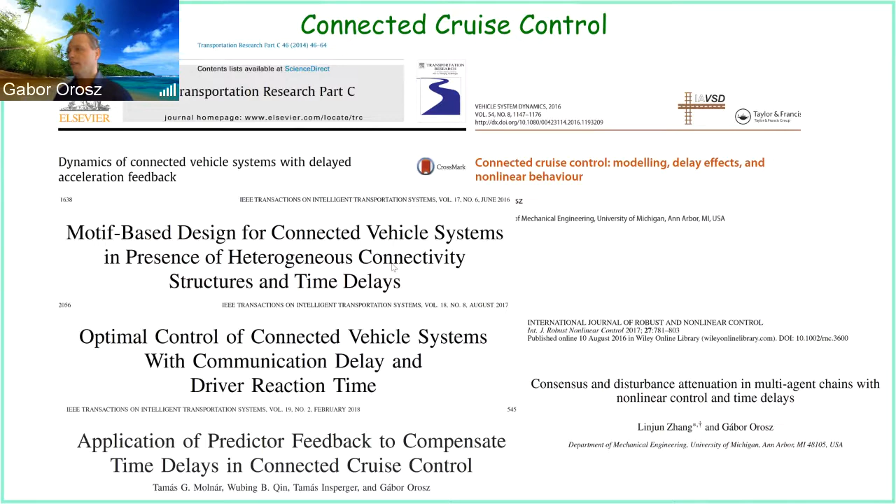But let me start with some very simple things. So, at the University of Michigan, we are very close to Detroit and the auto industry. So we do a lot of vehicle dynamics and control. Okay, and this is some basic knowledge which we also tell the students. So I want to review it so we are on the same wavelength. Okay, so this is a very prototypical model of longitudinal vehicle dynamics.

And what you can see here is that we represent the position of the vehicle and the velocity or speed of the vehicle along the road. But there are additional effects which can influence us. In particular, we have gravity. We also have rolling resistance. We also have air resistance.

And this last term here, which I'm going to highlight, if my mouse works. Yep. So this one is related to the torque, which we are putting on the wheel. Okay. And I immediately put something here. So there are two important quantities I'm highlighting here. So first of all, we can't put as large wheel torque as we want. There is some kind of saturation function related to that. And on the right, I'm showing this saturation function.

Essentially, what it results in is that we can't output in terms of desired acceleration as large as we want. So we will be limited between, let's say, somewhere maybe -8 to +3 meters per second squared in case of a vehicle. As a matter of fact, it's a little more complicated, as this other figure shows here, that the power limit of the vehicle also matters. So how many horsepower you have, that is going to influence in particular the high velocity regions.

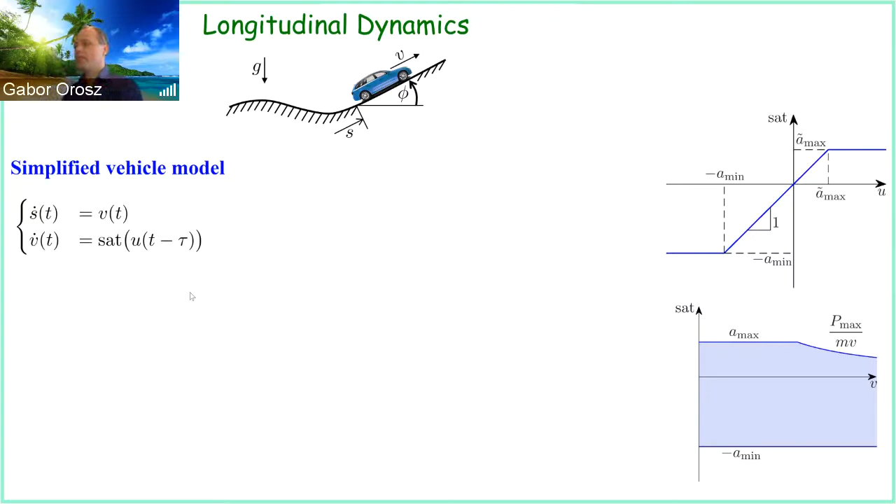Okay, so of course, this is a lonely vehicle on a lonely road. We're more interested in what happens when the vehicle has to respond to other vehicles ahead. So when we talk about adaptive cruise control, then we at least have to have two vehicles. So this automated vehicle is the one which I'm trying to control, and there is a human-driven vehicle which I'm sensing via a radar in this case. So you can also use cameras or LiDAR or whatever sensors you have, but you have to have a line of sight to be able to see this vehicle.

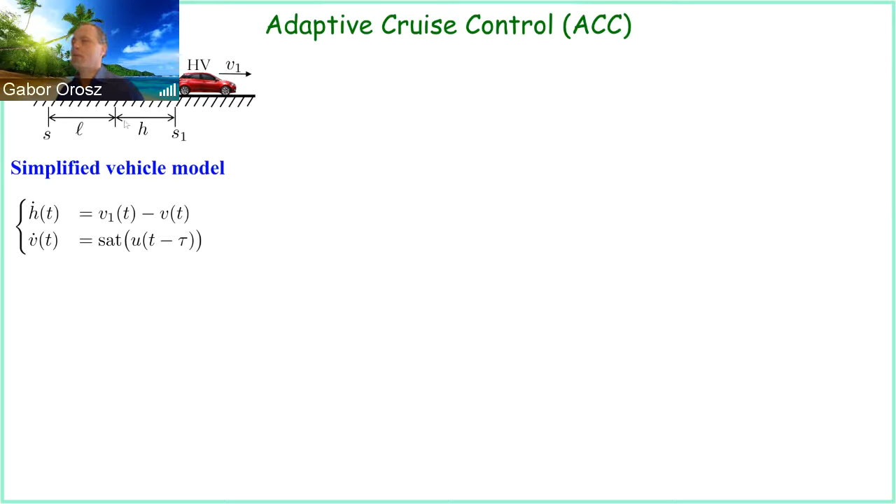And again, this is the simplified model. I changed the first equation. Rather than using the position of the vehicle, now I'm using the distance, because that's kind of part of the goal this vehicle wants to achieve. It wants to keep a distance from the other vehicle. Okay? And actually now there are standards about what is required for ACC. So there is typically a desired behavior which is saying that the vehicle should have a set speed. So we shouldn't go faster than that.

And also, if the distance gets smaller, so traffic is getting denser, then we try to keep a constant time headway here. So this kappa gradient of this range policy, or some people call it the optimal velocity function, is actually going to be equal to 1 over kappa. So the time headway is 1 over kappa, and kappa is the gradient. Okay, and this is one of the important parameters.

If you buy an ACC vehicle, then you actually often have these adjustments. You have like 1 bar, 2 bar, 3 bar, 4 bar. 1 bar actually corresponds to a really high kappa, which means a very short time headway, and 4 bar typically is more relaxed. So essentially that means that you have a smaller kappa and a larger time headway. So this is pretty much baked into every vehicle on the road which is ACC. And then for low speed, you typically want to stop, right? So you have to shift this a little bit, so you stop in a reasonable stopping distance.

So arguably the simplest algorithm to be able to maintain it consists of two terms. The first term is directly trying to adjust the velocity to this range policy. So that's kind of maintaining the distance with respect to the velocity, or the velocity with respect to the distance. So this is going to be the control input which we put out there. And the second term is simply trying to match the speed to the vehicle ahead.

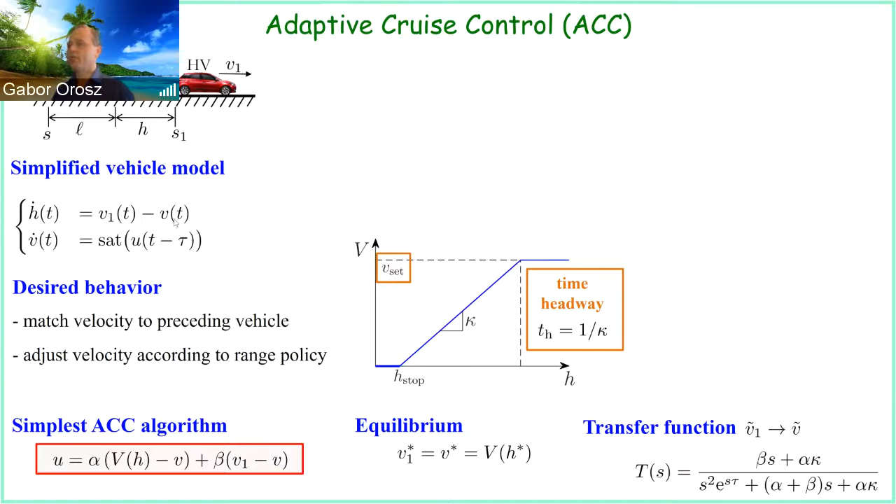So we linearize around this equilibrium and look at the perturbations around the equilibrium in the speed of the red vehicle and the speed of the blue vehicle. And this transfer function is what we use in order to evaluate the dynamic behavior of the system. Okay, so I would like to spend a couple of slides on looking at it, just to build up the tools which we typically use to design ACC, and then I'm going to show you how it actually works in practice.

So there are two kinds of stability which we are very much interested in when we design an ACC. One we refer to as plant stability. Honestly, there are different ways to call it, but this is just the standard notion of stability of dynamic systems that everyone refers to. If the system is stable, then when the driver ahead is running with a constant speed, we shall be able to approach this speed and follow it eventually with the right distance and the same velocity.

And if the system happens to be plant unstable, then this would not happen, and you can see immediately this would be a very detrimental behavior. Essentially, a plant unstable vehicle will very likely hit the one ahead. So if you are in the industry, you definitely want to make sure that your system is plant stable, because otherwise it would not be safe.

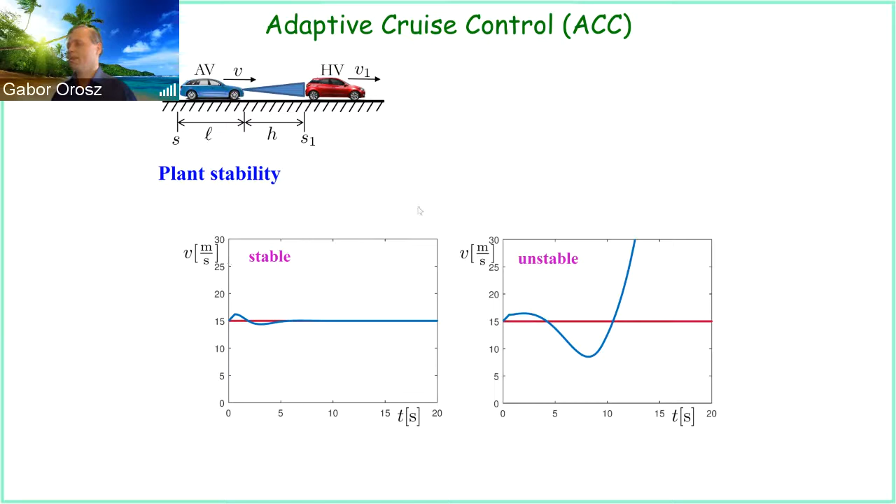So the way we evaluate it for our transfer function is we look at the denominator of the transfer function. We refer to it as the characteristic equation, and then we calculate the characteristic roots. However, if you have time delay in the system, which I'm showing here in this e to the s tau term, then it turns out you have infinitely many characteristic roots. This is one of the properties of time delay systems, and we really have to take care of all of them and keep them on the left-hand side in order to make sure that the system is stable.

So the task is a little bit harder than for ordinary differential equations, where the spectrum is just a finite number of eigenvalues. Still, we can ensure it and draw what we refer to as the stability chart. In this particular case, I'm plotting the stability chart for a particular value of the delay and a particular value of the time headway kappa, which I didn't note here, but it's 0.6 1/second.

And I'm plotting this chart on the plane of the control gains, because these parameters are the ones which we can design when we implement the controller on the vehicle, so we can tune these and choose one nice combination which has to be, of course, in this plant stable area. If you look at the eigenvalues, then indeed, inside this domain, all the eigenvalues or characteristic roots are on the left-hand side. If you are outside of the area, then you have some characteristic roots which are responsible for this instability.

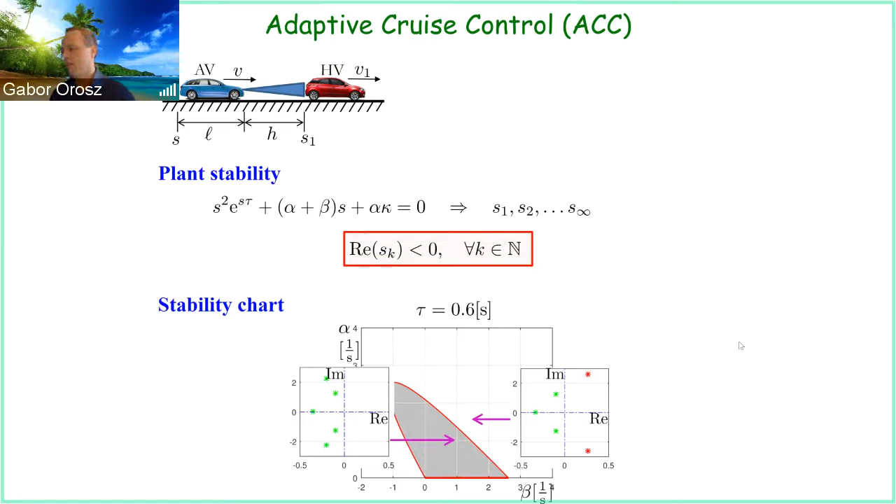Now, there is another notion of stability which we are also very much interested in. In the control literature, people call it input-output stability. A more specific version of it we refer to as string stability. String stability comes from the fact that after all, there could be many vehicles after each other and they make a string. But I'm going to explain it just in terms of two vehicles using the velocity.

Basically, the idea is that if our leader does some kind of velocity fluctuations around the steady state, then our follower automated vehicle is supposed to decay them and make these amplitudes smaller than the leading vehicle's. If the system is string unstable, it's probably not a big issue in terms of safety if these oscillations are not large enough. But it can be detrimental in terms of the traffic flow, because if all vehicles are doing this, then their motion will eventually lead to congestion.

Okay, and there are a few new papers on the market which say that essentially many of the ACCs which are sold today are string unstable, and the reason for that is because the companies may not be interested that much in the overall traffic behavior, but they're more interested in the passenger comfort, so they tune these controllers in order to achieve that.

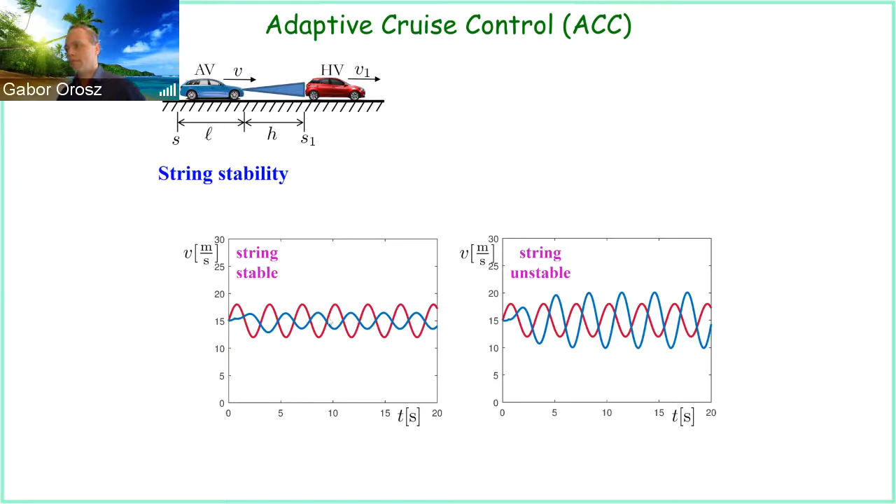Okay. Again, there is a nice condition which allows us to evaluate string stability, and we are going to use again the transfer function between the two vehicles. And if the transfer function is smaller than 1 for all frequencies, then we refer to the system as string stable, at least at the linear level, and in particular you have to specify what norm you're using and so on. Okay, I'm not going to get into these details, but the nice thing about this condition is that it's computable, and again we can actually turn it into a stability chart.

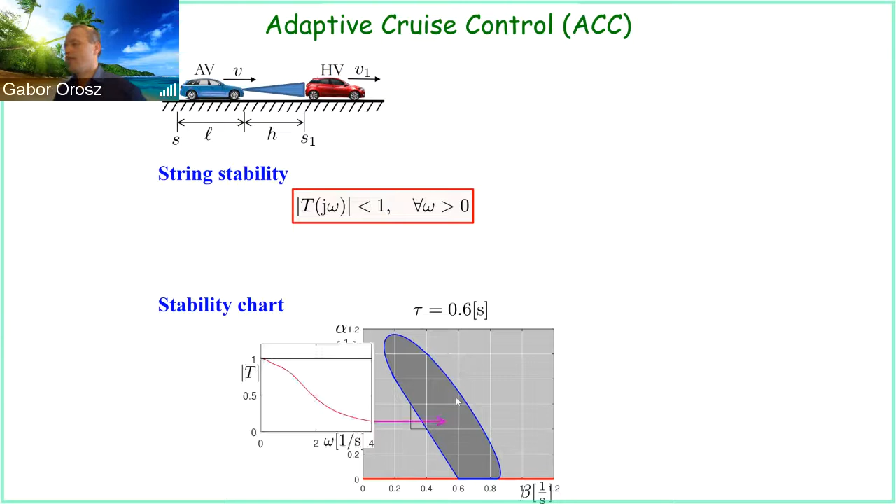So what I did here, I zoomed into the previous stability chart. That's why everything is light gray, so this is all plant stable, and then I drew this diagram here, which is the string stable area. Okay, and an important thing again is that if you didn't have delay in the system, then this entire big upper part here would be string stable, but because of the delay, we're going to have a much smaller domain. Okay, now if you are in this string stable domain, then your transfer function is always smaller than 1 for all frequencies.

If you are outside of the domain, then the transfer function is going to be larger than 1 for some frequency domains. It's not necessarily larger than 1 for all frequencies, but some frequencies. And these are the frequencies your vehicle is going to be sensitive to. So if you get excitations from the leader in these frequencies, then essentially you will have this issue of string instability. Okay? And a very important thing that happens here is as you increase the delay, there will be a critical time delay, and beyond that delay, basically there will be no string stable area.

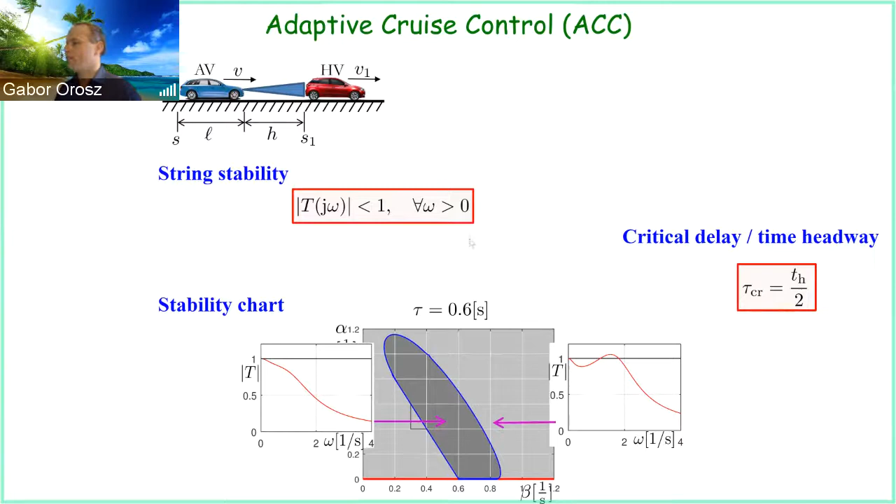Okay, and interestingly, this is nothing else but half of your time headway. This can be shown analytically, and so what it means is that if you try to travel with a 1 second time headway, you cannot have larger than half a second delay in your system. Okay, or vice versa, if you have a delay given, for example in this case 0.6, your time headway has to be at least 1.2 seconds in order to have the possibility to have some string stability. Okay, and it's a very strong condition on the system, and I will show you that actually this is true in experiments as well.

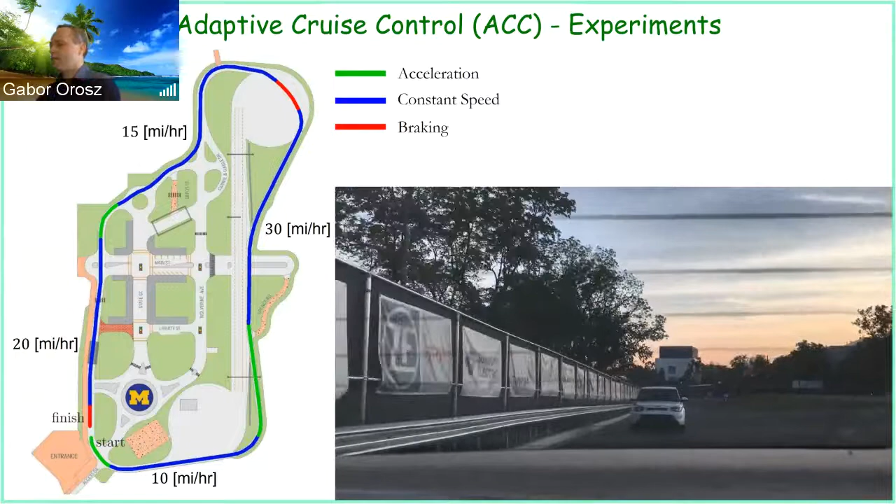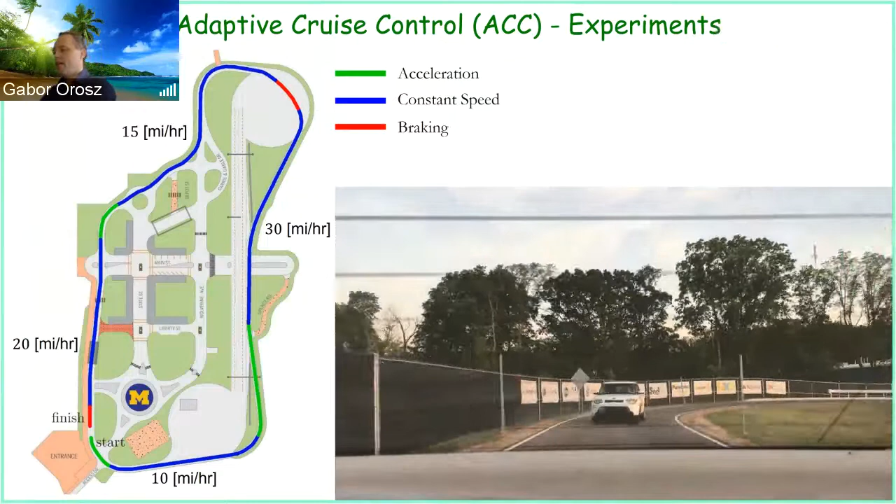So now you see basically the camera from the leading vehicle looking back to the automated vehicle. So the automated vehicle is following us. And the test we were running consisted of acceleration, braking, and also some constant speed sections. So this is one of the constant speed sections. You will see this is where we start to accelerate. And then the other vehicle is going to lag behind a little bit, right? And then eventually catches up with us.

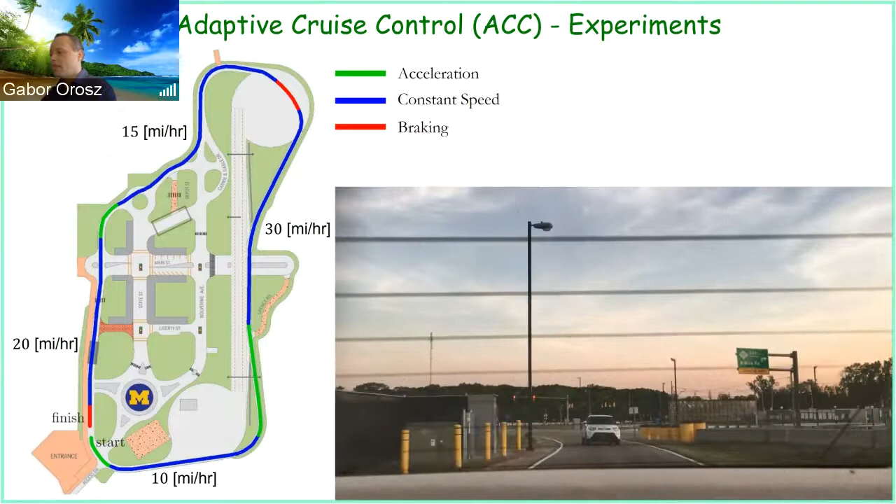Again, we run a constant speed section, and there will be a relatively harsh braking at the end of this part of the section. We are taking the curve, so we are somewhere up here on the northern part of the test track, and soon you can see that it worked really nicely. The vehicle behind us stopped. The driver was just there for safety, but he was so relaxed that he even put his hand out on the vehicle.

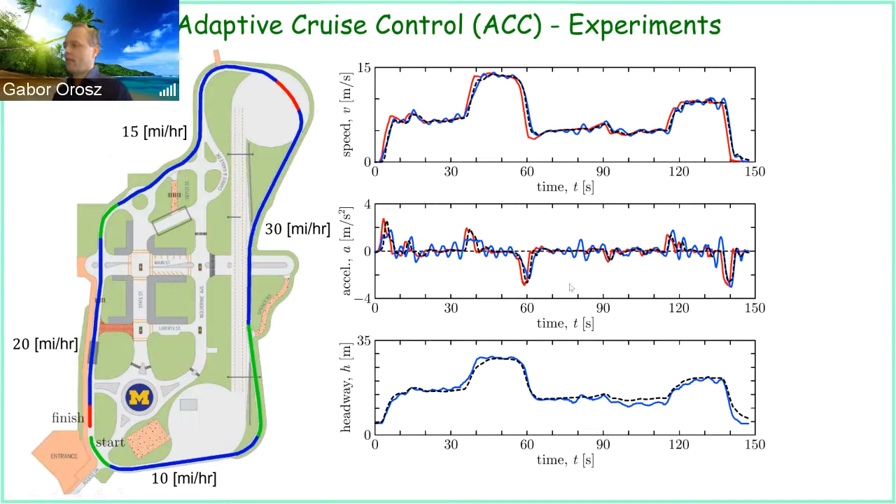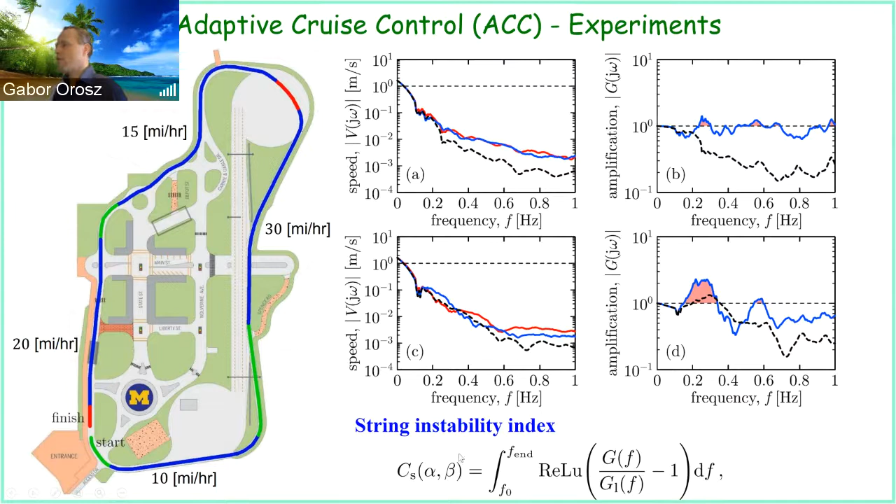But now you can see in case of the bad run, things get much worse. As a matter of fact, in this case, both the theoretical and the experimental data show a pretty large peak here. So it actually shows that we have a string instability in the system. And to quantify it, what we basically do is integrate these red parts, and this index, which we call the string instability index, is very useful to evaluate the experimental data. It accounts for this larger than 1 area. So if this is large, that means the system is quite string unstable, so you don't want to choose those particular parameters for your ACC system.

So here is how it looks, and now I put these string instability indices on top of the string stability chart. The string stability chart is drawn for 3 different delay values, just to see how robust we are to that. And again, the size of the points is related to how string unstable you are. So what it shows is that this middle area here is actually doing pretty well, and that's exactly where we have string stability according to theoretical calculation.

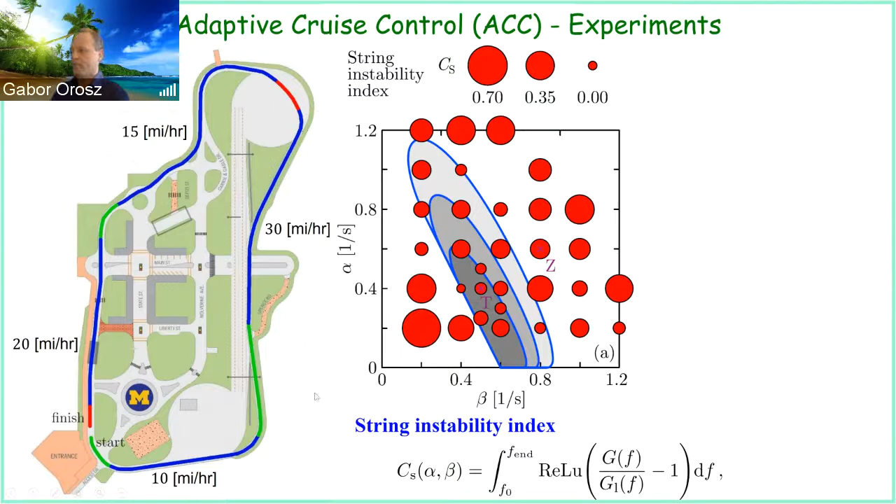But if you are outside, and this Z was actually the bad data which I showed you, then you can have much worse behavior. So this allows us to, number one, justify the theoretical calculations, and number two, really choose and fine-tune these parameters in order to have a nice ride. So that's kind of the typical way someone can design a string stable ACC controller. Now let me show you a little bit more on this.

So, in the traffic flow community, there is a big question: how are these ACC controllers going to influence traffic when we mix them into the flow? What I'm showing here are actually 4 different simulations for 4 different penetration levels of automated vehicles, and I'm using exactly that nice design which I showed. The human drivers are described by the optimal velocity model in this case, but you could use the IDM, the intelligent driver model, if you want. That wouldn't change too much.

And what happens is that if we only have human drivers, then indeed the system is string unstable. So an initial braking from the black vehicle at the front is actually going to propagate and keep increasing.

Okay. If you mix AVs into the system, you can see it starts to get much better. For example, down here, I think it's maybe 15% penetration of AVs. It's about 33% and 50%. And indeed, as the AV penetration gets higher, because these vehicles are designed to be string stable, we start to have better behavior. And maybe around 50%, actually, you reach string stability. So that's a pretty high penetration of AVs required to actually stabilize the flow.

And just to mention here, the human parameters were also obtained from real data, so they are not just made up. These human drivers really drive this way, so these are realistic parameters. Okay, so it says that if we have AVs and they drive nicely, and the second condition is very important, then actually we can improve the traffic flow significantly. But it also says that we need a large penetration of these vehicles in order to make sure that the traffic is actually string stable.

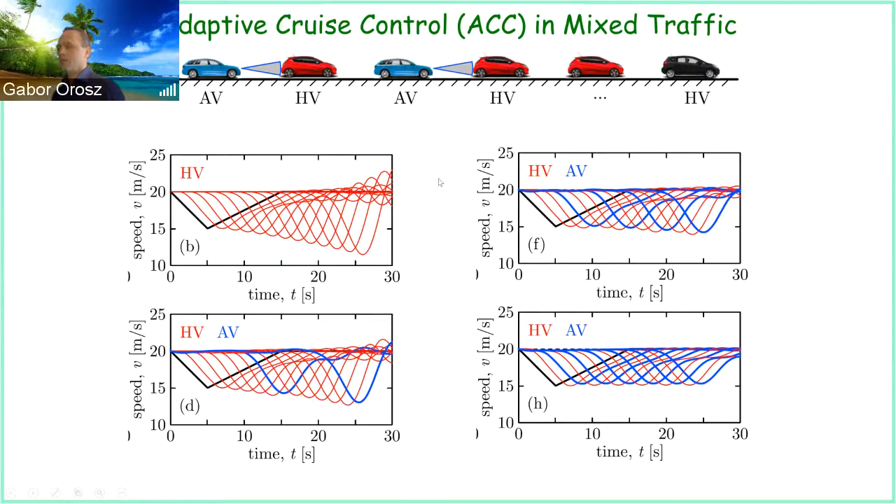Okay? So now I would like to switch gears and talk a little bit about connectivity. So far I haven't really mentioned any of this. These vehicles could achieve this motion just by optical sensors, so radar, lidars, and cameras, and that's how the current AV industry is rolling these days. Okay? So let me show you what happens if we add connectivity to the system. Now, in order to explain the concept, I'm going to look at probably the simplest possible scenario.

Okay, so I'm only focused on these 3 vehicles. The first 2 vehicles are human-driven vehicles. They are not automated by any means, but the first vehicle here actually has connectivity. So what it means is that this connected automated vehicle is able to sense the vehicle ahead by the range sensors and able to get motion information from beyond the line of sight using connectivity.

Okay, and when I turn it into the control design, this first part of the controller is exactly what we had before. And the second part is actually coming from this connectivity, and as you can see, it's very simple. It's just a velocity difference. So this CAV is trying to match its velocity not just to the vehicle ahead, but also to the vehicle which is 2 vehicles ahead. Okay, this is that simple. At the same time, I'm using the same range policy of following. I didn't change anything on that.

Okay, now the system becomes a little bit more complicated, right? Because we have to account for more vehicles and think about string stability a little bit more carefully. Now, what we did is we basically again go to the level of transfer functions, and we figure out how the HV responds to the CHV and also how the CAV responds to the HV and to the CHV, and these are represented by these transfer functions, and we call them link transfer functions. After you linearize your equation of motion, that of course includes modeling, in this case, the human-driven vehicle with some car-following model, then you can actually establish these transfer functions.

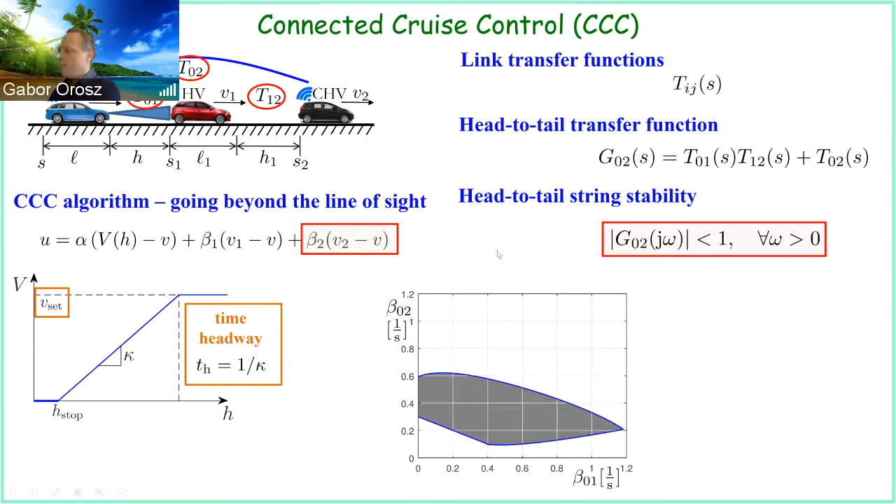Okay. If you add the connectivity, you can actually push it below 1, okay? And in this case, this becomes a really nice and string stable system, okay? And it's quite a dramatic improvement. And the only thing we did, we added connectivity between the lead vehicle and this last vehicle, okay?

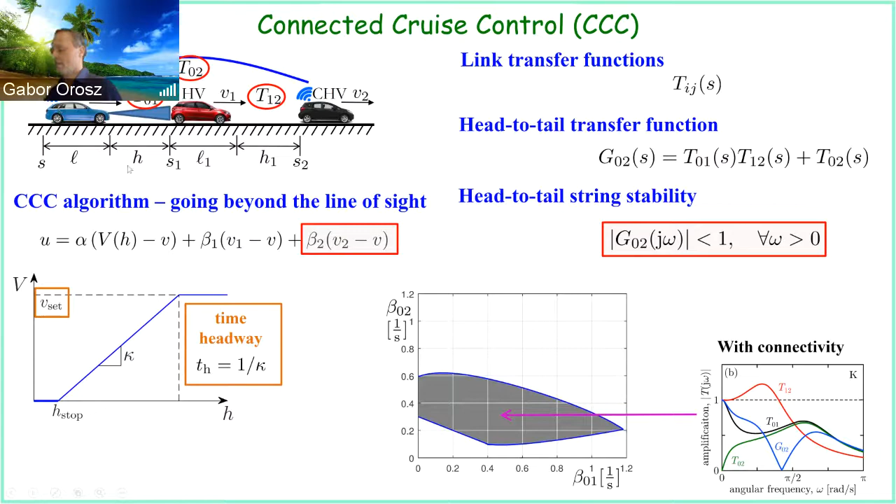Of course, we want to make sure that this is scalable for larger systems, okay? And we have the right amount of modularity, I believe, because we are not requiring these guys to cooperate in this case. We can't, right? The human here is just human. We simply use extra information at the CAV. Okay? So now let me show you some experimental results.

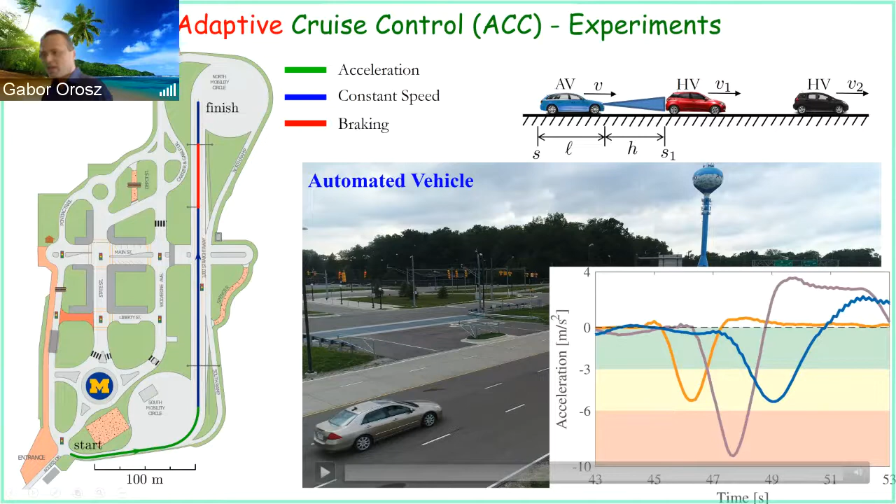So what it means is that it's doing much better than the vehicle in front of it, but in terms of head to tail, it's still doing roughly as bad or as good as the front vehicle. Okay, so this is still a harsh braking. You would really know if someone does a braking like this.

However, if you add the connectivity, you can see you get into this green zone here. So your acceleration actually goes around minus 2.5 meters per second squared. That means if you have a cup of coffee in your hand, not a droplet would spill out. Okay, this is a very nice and very smooth ride. And the only thing we did was count in this additional effect of connectivity.

Okay, so obviously this has severe safety implications, right? Because especially now in Michigan, you know, it's very slippery out there. You would not actually be able to do these very harsh accelerations, okay? Because your vehicle would slip. But also there is a high level of comfort, which is helping us here, okay? And our original motivation was also making sure that this is helping the traffic flow of the vehicles. And I will show you that actually it is the case. This is indeed scalable for a larger number of vehicles.

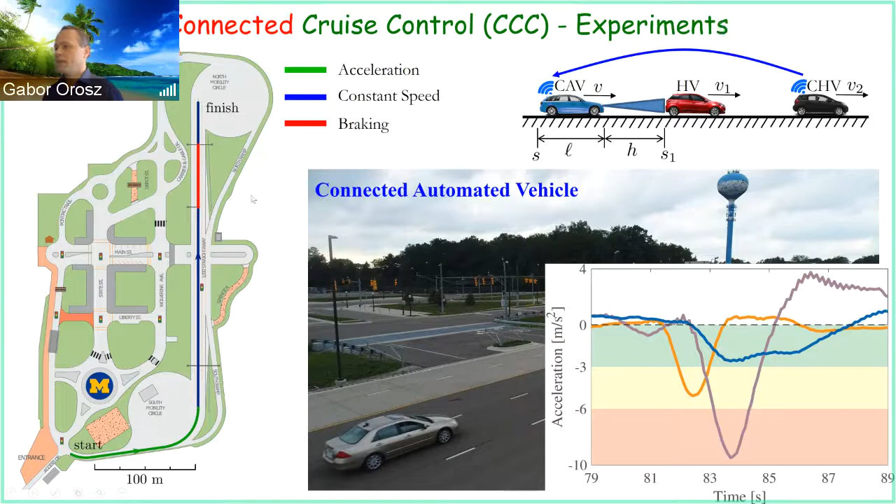Okay. So let me show you here a simulation. So the top shows the scenario for a mixed traffic system where we don't have connectivity. Okay. We only have AVs, and as you can see for this particular motion, if every second vehicle is an AV, then we are indeed achieving this mild string stability. If every third vehicle is an AV, right, so 33% penetration, then we are kind of at the limit, okay? So for this particular signal, it kind of shows that it levels out. If you do a slightly different signal, you may get a little increase, okay?

The same thing is shown with connectivity at the bottom, okay? Where you can see how dramatically it improves the behavior, right? So in this case, the waves decay much, much faster, with the same penetration as we had AVs above. And if we have even lower penetrations, we can get very nice behavior, okay?

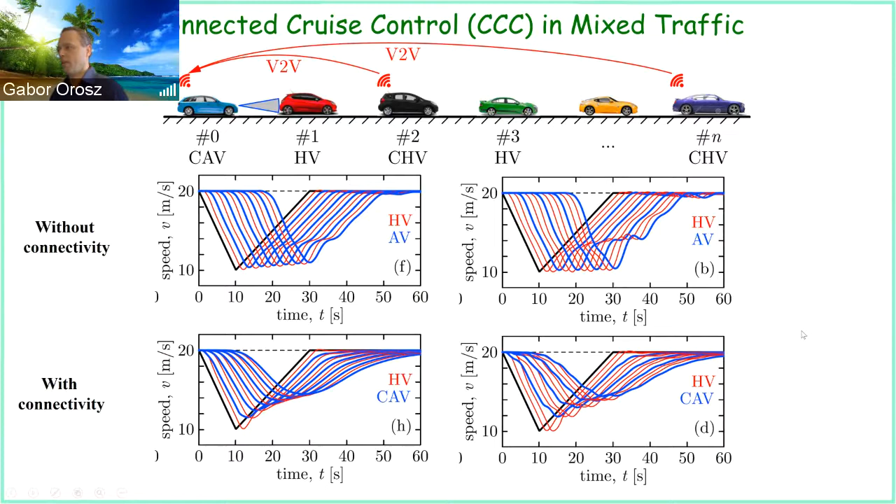So for low penetrations, the AV was doing some marginal case. When we do CAVs, we still have a very nice and beautiful behavior, almost matching the higher penetration. So this tells us that if we have connectivity in the system, then much lower levels of automation can actually give us nice traffic flow, okay? It does require, of course, that these vehicles are designed properly, and if you do so, then you can actually achieve this behavior.

Okay, so what we did was we put a chain of human-driven vehicles along this stretch of road, and then we asked the first driver to drive and basically make some brakes along the way. And these brakings are trying to mimic what happens in traffic. People often have these changes of speed, and we wanted to see how it propagates along the chain of vehicles.

And what I'm showing here is when we ran an ACC, a nicely designed and tuned ACC, and what you see is that the humans are actually increasing the perturbations as they propagate along the chain, while the AV cuts back a little. So if you compare the blue one and the red one, the blue is doing a little better than the red one. So experimentally, we were able to show that indeed the AV has a positive effect, okay?

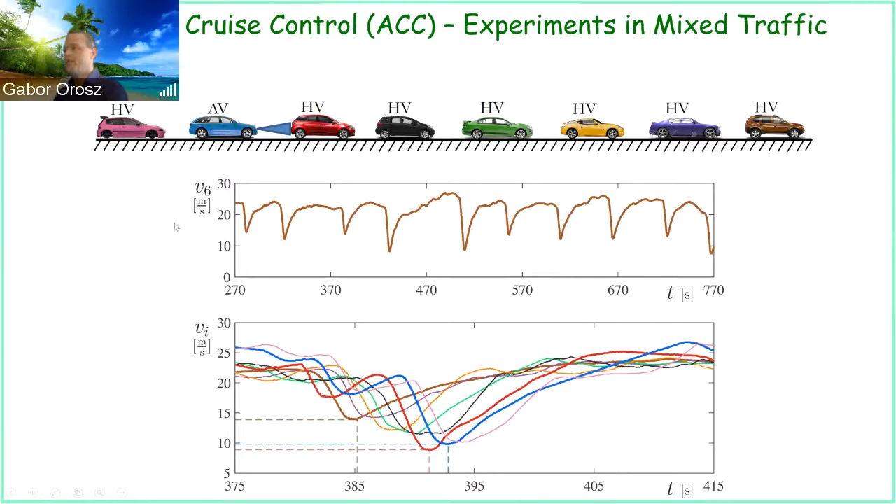However, once you start to add connectivity, and this is the scenario I showed you before, things start to improve. So already here we can see improvement. And it turns out it doesn't necessarily matter whether you talk to the vehicle which is 2 vehicles ahead or 3 vehicles ahead; with the same level of connectivity penetration, you start to get benefits. And of course, you can keep increasing the level of penetration and get better and better behavior.

Indeed, at some point you will saturate, but you will see here in this particular experiment, the blue vehicle is doing pretty much as good or even better than the brown vehicle at the front. So for this zoom here, this was very nice, okay? And it has a very profound effect on the flow.

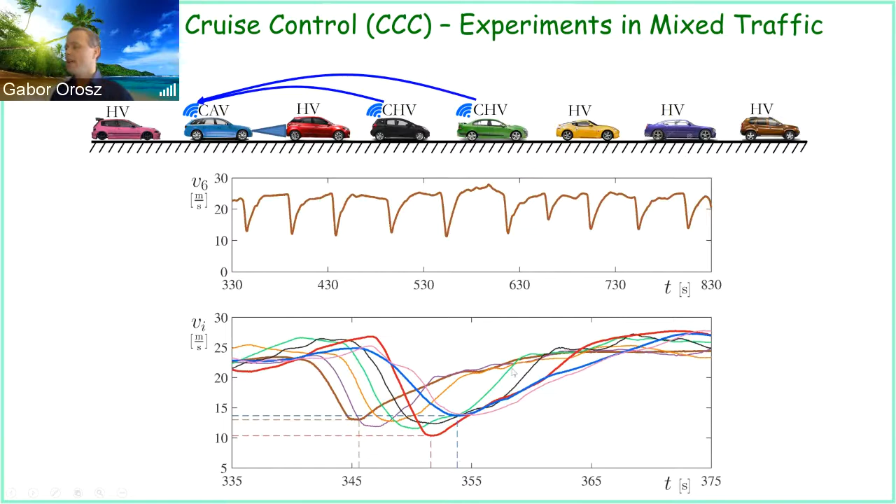Now, of course, you may say, well, wait a minute, you picked the nicest plots and you're showing them to us. You're hiding something. Well, that's true, I did pick the nicest plots, but let me show you that I'm not hiding anything. In particular, one interesting thing was when we had these different runs, we evaluated the energy efficiency. And for this, we did a lot of evaluation, not just for a single braking. Let me try to show you what happens here.

So this W is the measure of energy consumption of each vehicle. It's basically velocity times acceleration, but we only take into account the accelerating part and not the braking part, because I'm imagining that at that time we are not burning fuel. This is probably more true for new vehicles than old ones, but that's a simple measure of energy efficiency. And it's normed by the vehicle mass to be able to compare them.

So as we go along this chain from right to left, which is basically from brown to purple, these numbers increase. Humans are string unstable, they keep increasing the energy consumption. But interestingly, when you reach the AV, it cuts back all the time. The first experiment was done with just ACC. It cuts back 7% fuel consumption on average. And if you run the high connectivity, the last experiment, then you actually cut back 24%.

But one interesting thing is to look at the two compared to each other. What it tells us is that just by adding connectivity, which is a very cheap technology compared to automation, we can have about 20% energy savings just by the connectivity, okay?

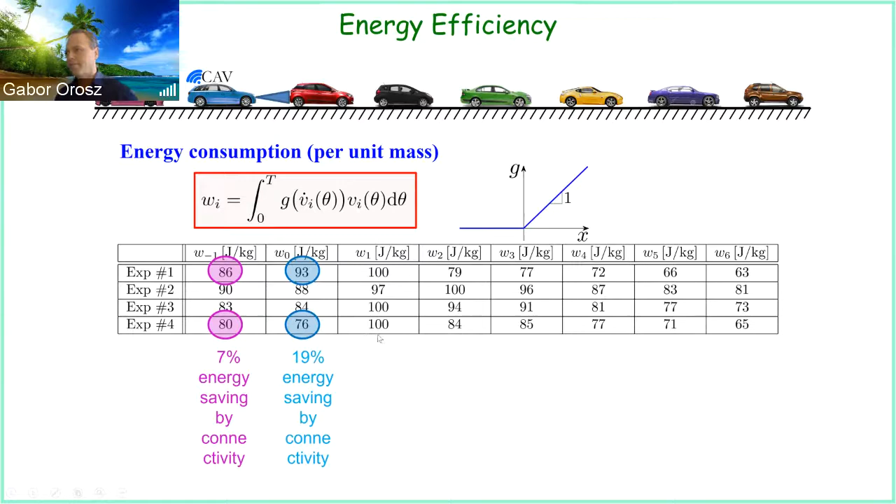Okay, now let me tell you maybe one last thing about what we are doing now. Indeed, there is an issue here, which is, well, how long it's going to take to get these vehicles connected. At this point the connectivity level is very low, and do we expect it to increase in the next decade or so? It's going to take a while until it picks up. Probably going to be faster than automation, but it's still going to take time. So we really have a connectivity gap here.

In a realistic situation, it might be that there is a vehicle in front of you which is maybe 100 vehicles ahead or 50 vehicles ahead. That means that you can't really communicate with it directly. But we can actually use infrastructure to support it, right? So the connected vehicles can actually talk to these roadside units, okay? And the information can be, through the internet, put to other RSUs where it can be sent.

In this case, we are using a truck, so that's why I call it a connected automated truck or CAT. And this vehicle can still benefit from the information which is coming maybe a mile ahead, or maybe 2 miles ahead. So that's a big improvement, and we certainly believe that automation and connectivity should go hand in hand.

It kind of reminds me a little bit that now we ask these AVs often to run on our 20th century infrastructure, right? So basically we say, go there in the wild and just make sure you can drive there without any infrastructure support. It would be equivalent if 100 years ago, they started to make the Model T and said, we want this vehicle to drive anywhere, any country road, on the field, and so on. Actually, there were people who were saying that. There was a big promotion asking Ford to make vehicles which do that.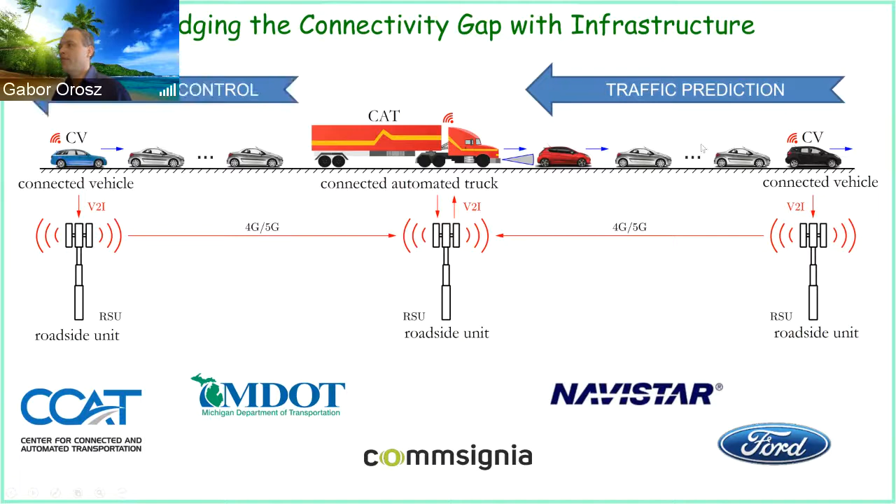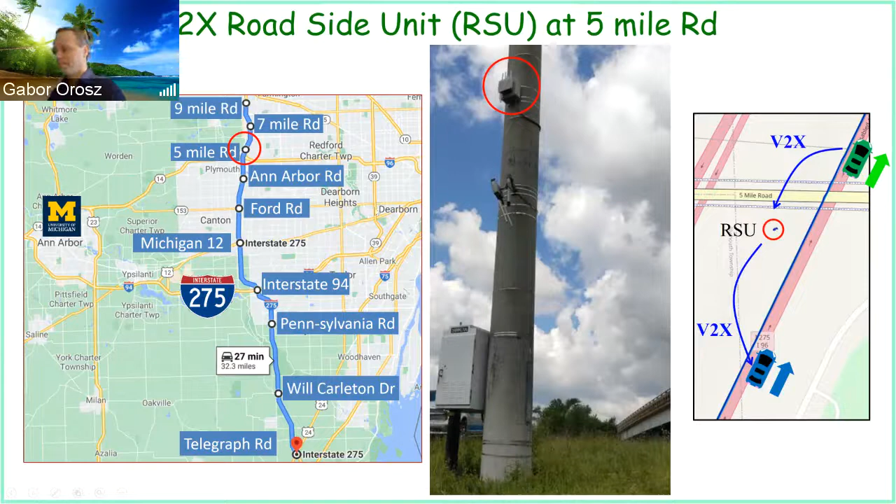Okay, so let me conclude. My time is getting close to an end, so let me start with that. We really want to focus on these high-level societal goals, and then as engineers, we need to turn them into some control objectives. In this case, control objectives of these connected and automated vehicles.

And as I hope to demonstrate today, connectivity together with automation may help achieve better performance and efficiency, both at the vehicle level, which helps the customer who is buying that vehicle, which is very important, as well as the system level, i.e. trying to achieve those high-level societal goals, and we are getting there, okay?

So as my last slide, I would like to mention, of course, I don't do this research on my own.